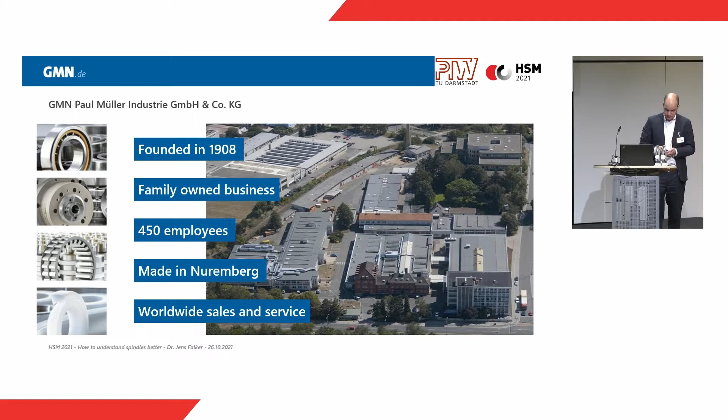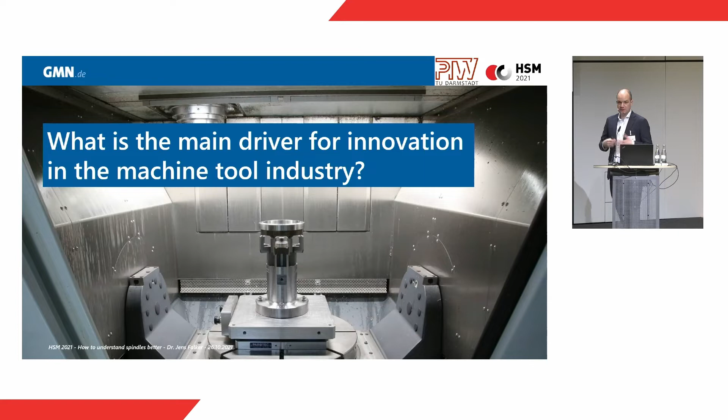In this presentation, I want to give you an impression on digitalization. When I was preparing the speech, I asked myself, what are the main drivers for innovation in the machine industry today? When you go to conferences nowadays, and it started again a couple of weeks ago when I was in Aachen, we talked about data-driven sustainability, how can we use data. I looked in the newspapers and found an article about trends in the machine tool industry.

So one can say digitalization is the key driver of innovation nowadays. It's also, as we have just seen, the research projects, most of them are about using sensors, bringing information together, bringing collaboration cross-domain. The machine manufacturer, the spindle manufacturer, the tool manufacturer, all the different knowledges are at different people or different companies, and we have to bring this together. This is what digitalization is about.

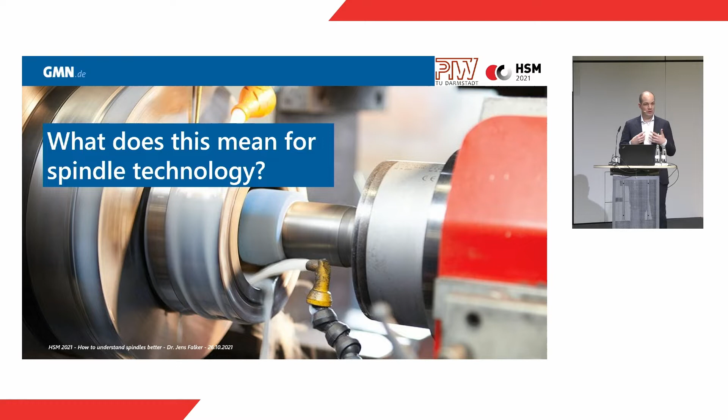For us as a spindle manufacturer, the question now is what does this mean, what does this mean for spindle technology, what is our duty now, how can we address this. Let me start with a short example. When I went to university, we talked about the automation pyramid. We had a strict hierarchical organization of how a company works: you have field devices, sensors, and then the different levels within your company.

Nowadays, this pyramid is transferred to a network. The hierarchies we had in the past are gone. It's possible to communicate between all the different layers of a company, so a sensor can talk to the ERP system. We don't need the SPS for this anymore. It's now possible that everything can be interconnected, and this is more or less the basis for digitalization, for new solutions, for this kind of new business models and so on. For us, as a spindle manufacturer, we are at the very bottom of this.

We are a classical field device. We have sensors in our spindles, we are connected to the SPS, and in the past, the spindle ended at the end of the spindle. We didn't look what comes next. Cables came out, we were connected to the SPS, and we were done with our business.

And this has changed because now we can make a connection to all the different layers. We can not only connect to the SPS, we can connect to the MES, to the ERP system, and we can even connect to different companies. We can interconnect our spindles between different facilities at different places on the globe. This is what the new technology brings to us, or what possibilities are there.

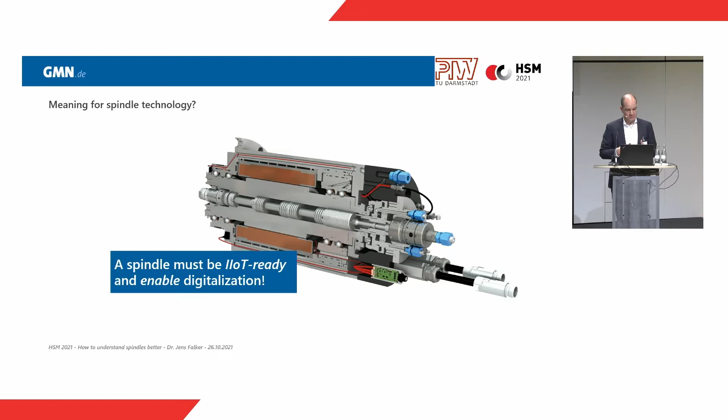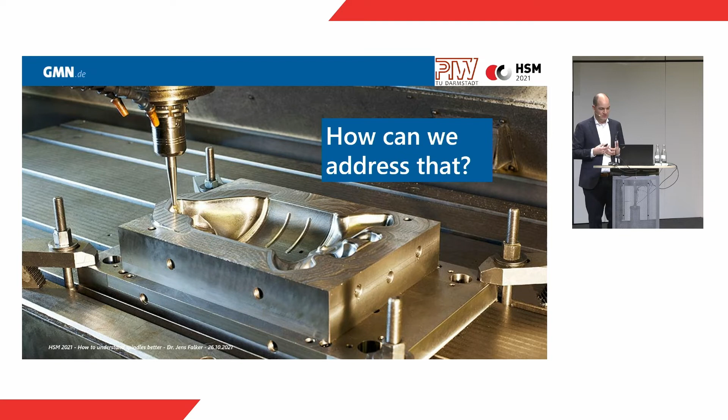Let me explain how this can work, or how we as a spindle manufacturer can address this, how we can be IIoT ready. To explain this, I want to start at the very beginning. At the first generation, when we started building spindles, we built spindles with external drive. This was a pure mechanical component: bearing, shaft, housing, done.

Then we started to integrate the drive. We had motor spindles, which is common today. In these spindles, we already had some sensors. But nowadays, state of the art, we have integrated sensor systems. So the spindle is not just a mechanical part with a motor, it also has sensors, and it does not only have sensors, but it also has microchips in it which interpret sensor information, which give information. So it's integrated sensor systems. But still, this is just where we are today, and it's not really digital.

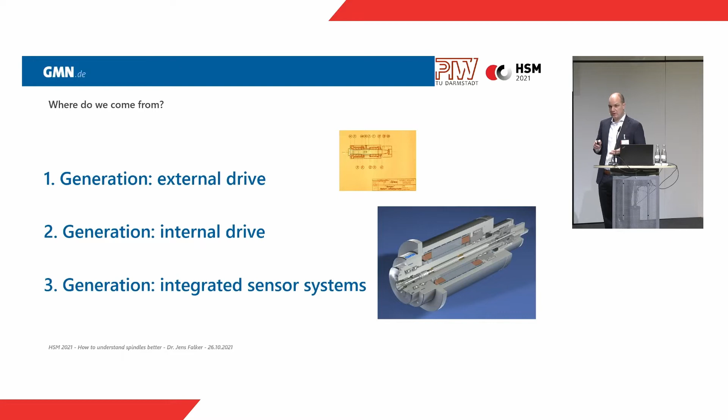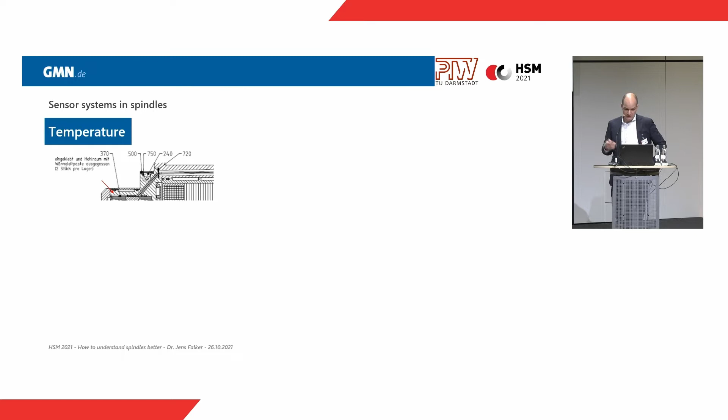Let me give you some examples of what we have in a spindle. For example, very common, we have temperature sensors, very easy PT elements, which are in the spindle. We have acceleration sensors. We have the clamping unit. This is a good example for an integrated sensor system. Such a system has a couple of sensors, 3, 4, 5 sensors, which measure the position of the shaft, measure some other systems, and you get information on what your clamping unit does too. Is the tool in the right position? Is there a tool in the spindle or not? So you get real information, you don't just get the position of the shaft. The interpretation is already done in the spindle.

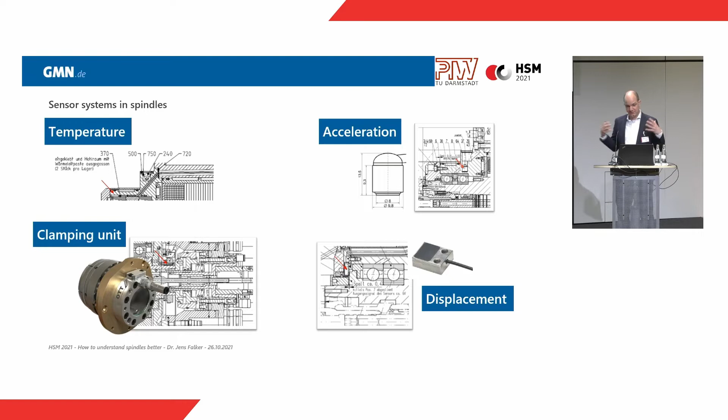And another example, we implement displacement sensors. So many different sensors which are in the spindle, and this is very common. All of us do this, all our competitors do this. But how does the information come, or how is the information created?

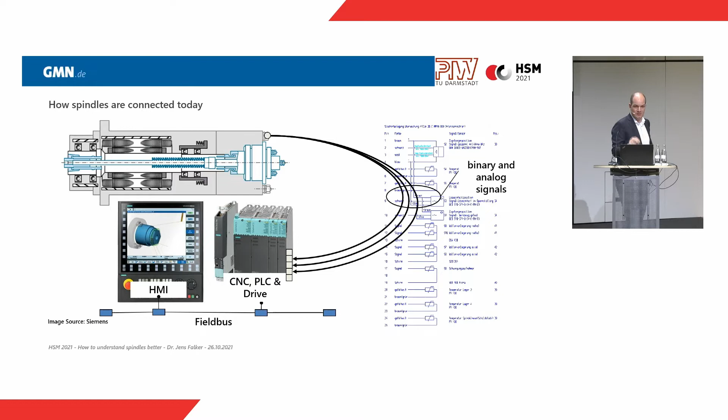When you look at this picture, this is how spindles are connected today. There's a multi-plug at the back of the spindle with, I don't know, 20, 25, 26 pins. And all the signals coming out of the spindles are analog or binary signals. These signals are brought to the machine cabinet, and there the analog digital converter is used to bring the information into the digital world, and you bring it to the field bus and you can use it.

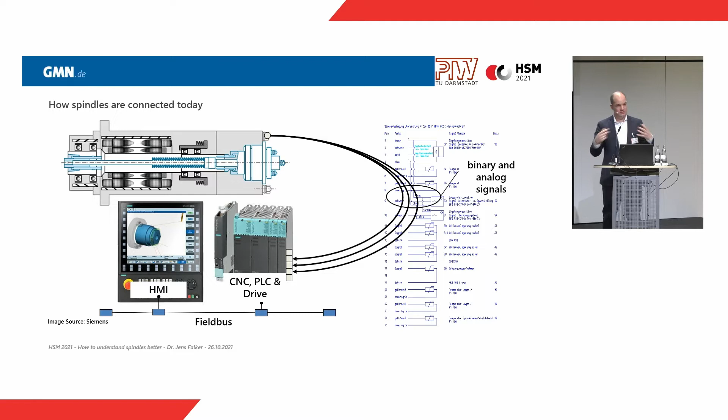Let me give you an example from our all-day life. This is when you are in your home office and you want to plug your mouse into your computer. This is as if you need a screwdriver to bring your mouse to your computer. This is the level the industry is at the moment. So that's not just a USB port, you just plug it in and everything is running. You need a screwdriver and you need tools, you need to implement things. It's very, very complicated. And in our opinion, this is not up to date anymore. There are much better solutions for this, and this is the basis for a digital spindle.

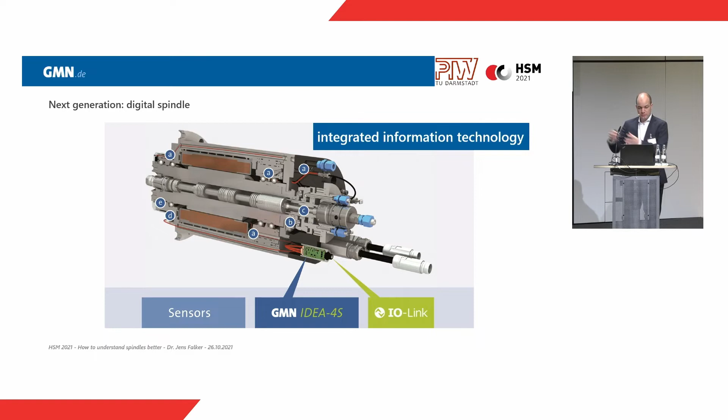So in our opinion, the next spindle has to be digital. The sensors within the spindles have to be integrated into information technology, and for this we use an embedded system we call IDEA4S. So the AD converters are within the spindle. The information is coming to the machine cabinet in a digital format. So we utilize a serial interface to connect spindle and machine. And this makes it possible to not only bring the information from the spindle to the machine, it also makes it possible to bring information from the machine to the spindle.

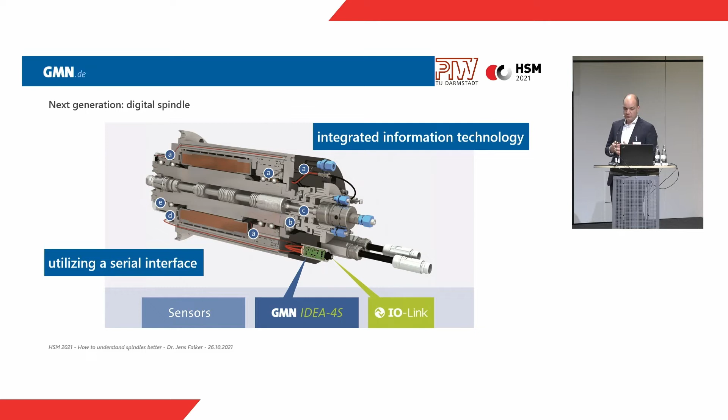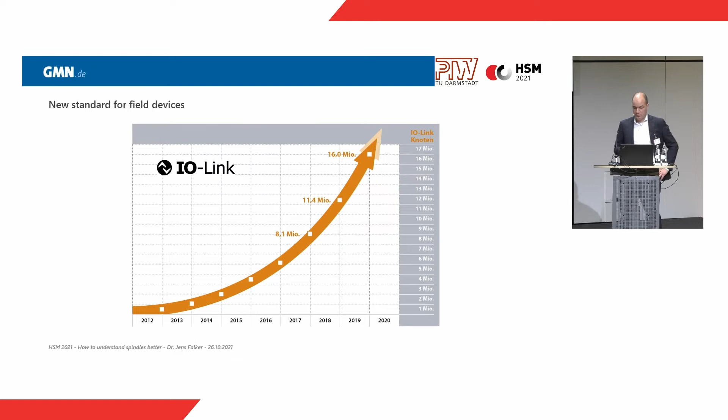Why do we use IO-Link? We use IO-Link because it's a standard widely used in the industry, and in our opinion, it's the new standard for field devices, for standard sensors. When you look at the sensor manufacturers, it's often the case that IO-Link sensors are even cheaper than classical analog or digital sensors. So this technology is coming to the market. The nodes in the field are growing exponentially, and this gives us new opportunities.

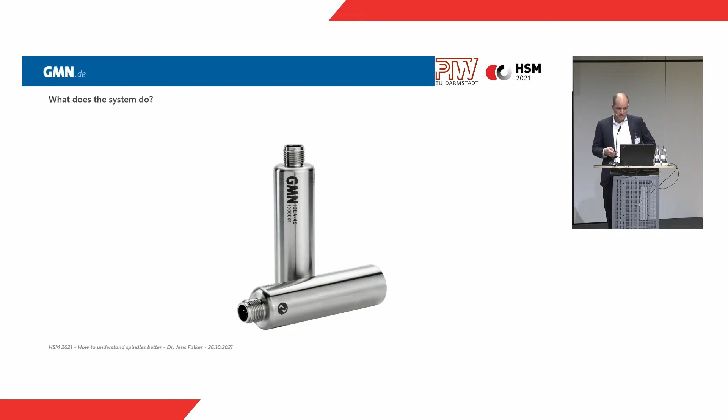So what does our system do? At the end, it's a platform for digitalization, and the idea in the first spot is to measure information, to bring sensor information to our machine manufacturers, so you know what is the temperature of a bearing, what is the displacement of the shaft. At the beginning, it's just measuring.

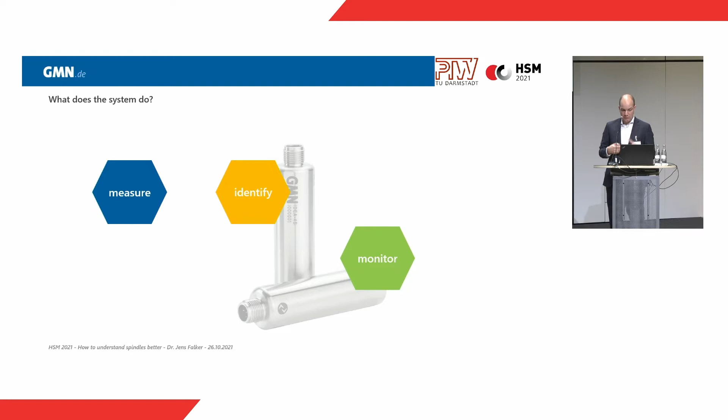But it's also identifying, so what is the spindle I have there? What does the spindle do? What are the properties? And then how can we monitor a spindle?

Just to give you an example, what signals can be measured: it's the speed, the clamping unit, the temperature, the displacement, the vibration. So this kind of information is already there, and also the standard we have today. So the information is just analog and binary, and now it's digital.

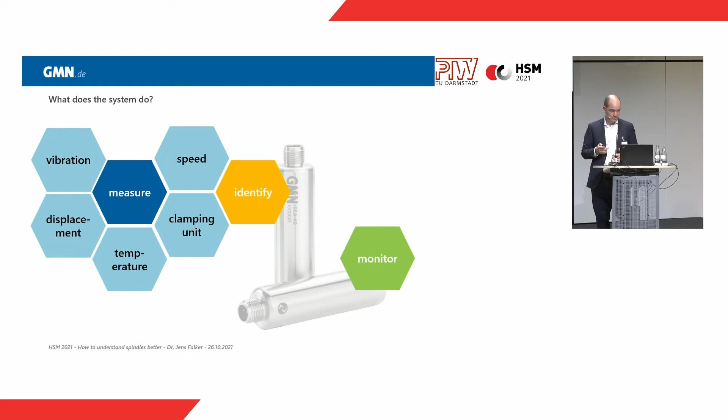We can identify the spindle with a digital type plate, and we can also put application data into a spindle—what is the spindle used for? The machine can write this information into the spindle, and when the spindle comes back to service, you know the spindle has been mounted to this machine in this factory, and it has been used for that. So you understand what your spindle is used for.

It also makes it possible to do something like asset tracking. A spindle is a very valuable component of a machine tool, and many end customers have several machines, several spindles. They have spindles in stock for repair, and if they know which spindle is in which machine at every moment, and which spindle is in stock, it's much easier to know where are my assets and to plan everything. At the end, we want to be a platform to monitor a spindle.

We want to give a fingerprint, we want to give a status on sensor signals, so it's not just about giving the temperature information, but telling you, is the temperature okay? And we try to bring our knowledge, our domain knowledge as a spindle manufacturer into this.

So we try to look not only at one signal, we try to look at all signals and interconnect them. Just to give you an example, when the temperature of a spindle is 40 degrees, this doesn't tell you anything. It's very important to know what's the speed at this moment—is it 60,000 RPM, or 30,000 RPM, or 10,000 RPM?

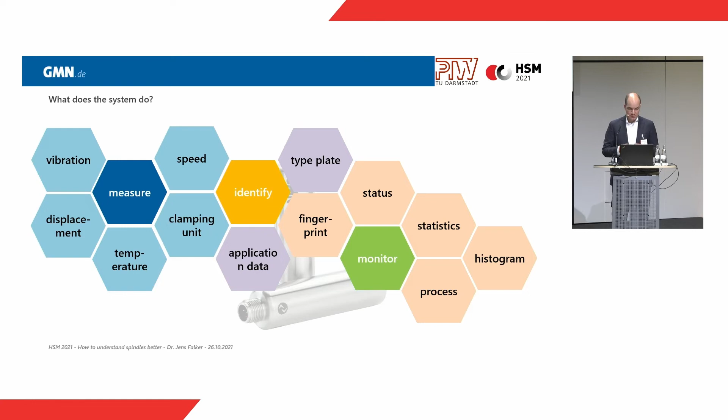What we hopefully will talk about over the next 2 days is that we have to bring the knowledge from all the different domains within a machine tool together. The information on the tool is somewhere else than the information on a drive and the information of a spindle. And someone who builds a tool has more knowledge on a tool than someone who builds spindles, and the other way around.

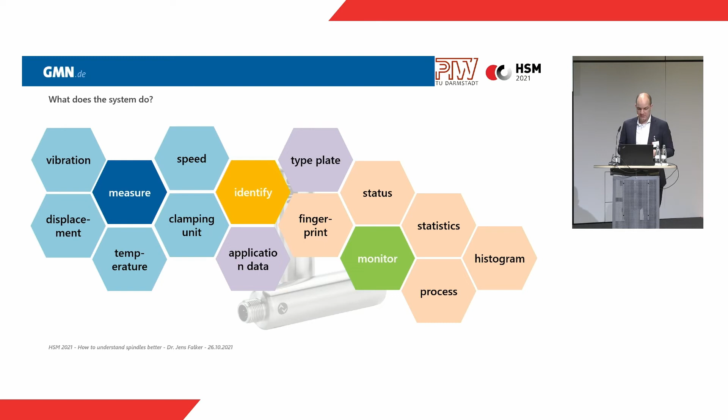So we have to bring this knowledge together, and we need a platform to utilize this, to make it possible to access this information by the end customer. We have to generate value there. Just a very, very short example for a histogram.

As I was talking about, the idea is to bring different information together. As you can see here, this is a diagram with the rotational speed of the spindle and the temperature of the bearing. So this is the kind of information we can collect within the spindle. We know at certain speed ranges, how long has the spindle been operated at a certain speed range, and we can also look at this with the temperature.

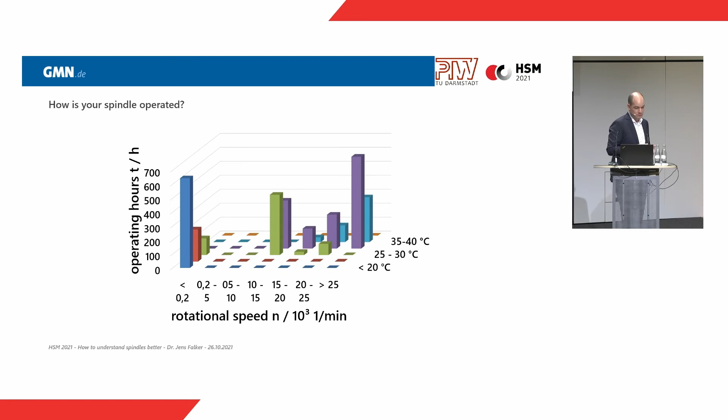A temperature of 40 degrees at maximum speed is a different thing than 40 degrees at medium speed. So you have to interconnect this information and bring it together with your knowledge about the product.

So at the end, our system is first of all digitizing a spindle. It brings the analog and binary values or information of a spindle we have today into the digital world and connects it to IoT infrastructure. And as I said, for us, spindles usually ended at the cover of the back of the spindle.

And nowadays, with this technology, we are now connecting to the machine infrastructure, where there is the IO-Link master, which connects the information to the SPS, where it can be used as today to monitor temperatures, vibration levels, and so on. But, and this is the very important part, in the world of IoT, it's now possible to bypass this information to the IoT world.

So the information of a sensor does not only go to the SPS, it can also go bypassed to another solution, to interconnect machines, to bring data into the cloud, to bring it to an edge device, to make remote services possible without putting performance out of the SPS.

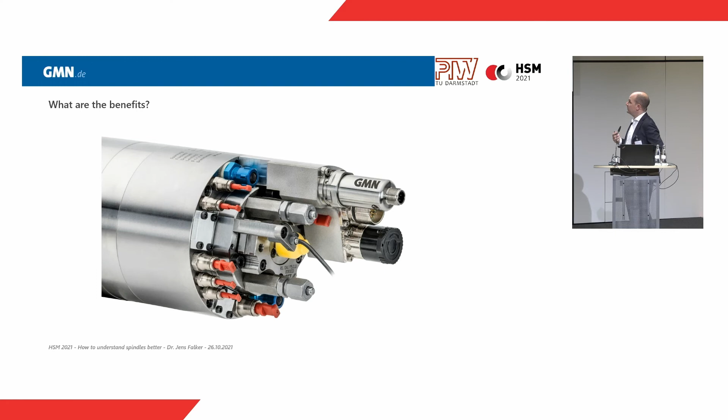So what are the benefits of such a system, just to give you a few? First of all, it's easy and robust machine integration. And then it enables digitalization, and that's what I meant.

So the system, first of all, brings the information of a spindle to the digital world. It's not in the first step creating new business models or these kind of things. It's just the start. It's just the first step.

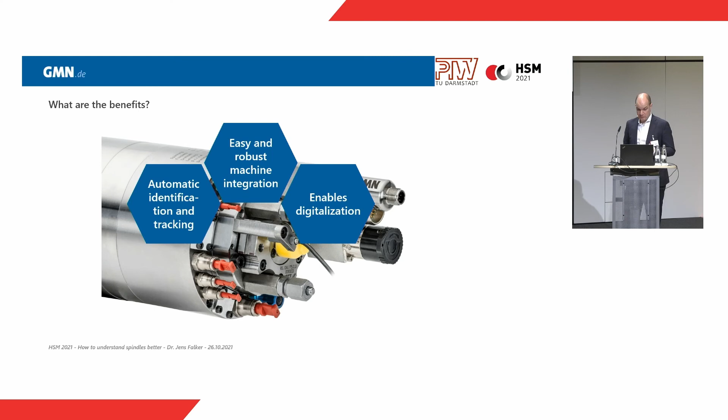Digital information in two directions. So the spindle and the machine can now talk. This was not possible before. So it enables digitalization. It makes it possible to identify a spindle and to track a spindle.

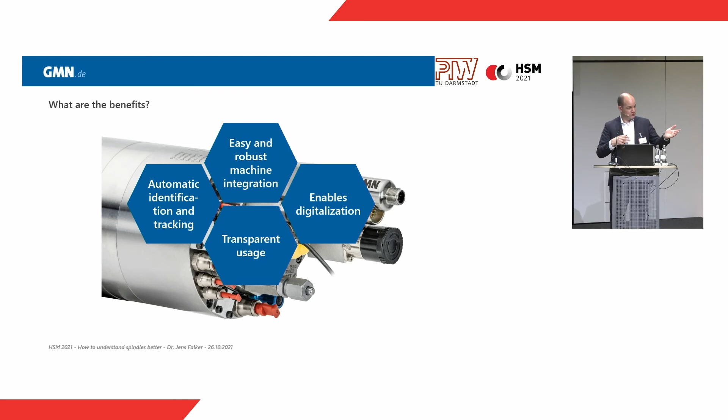It generates transparent usage, so you know at which speed, at which temperatures, and so on. So in a case of service, you can understand better what has happened to your spindle. It makes it therefore easier to do diagnosis during service, to understand what has your spindle been doing, how has it been operated, and was this good or was it not good? It gives you a hint.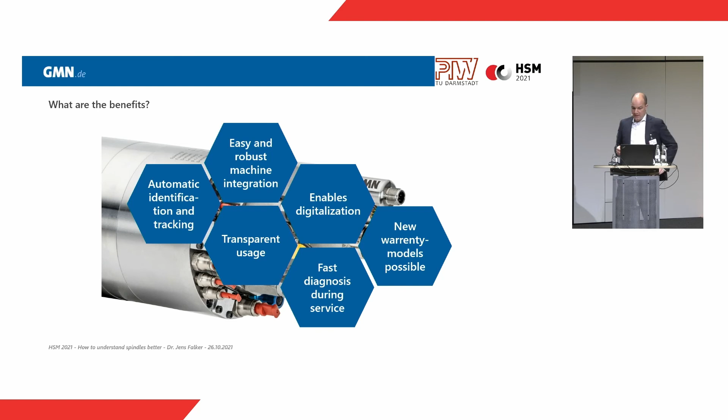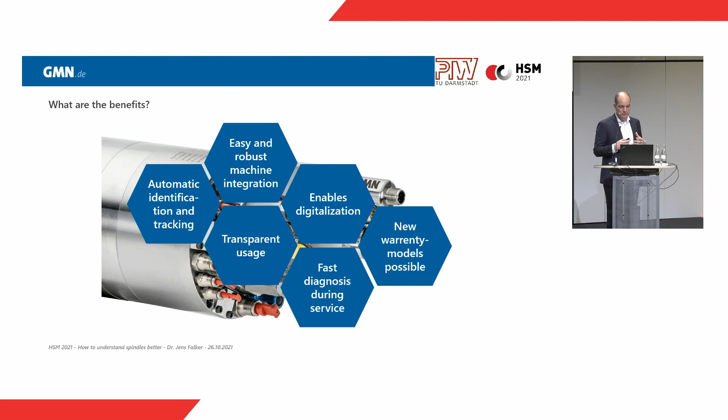And it also makes it possible to do new warranty models. But as I said, this is just the basis. This is not really an IoT solution at the moment. It's just an analog information which is now digitized, which can be used, but we now have to do the next steps.

And create customer benefits by collaboration. So the spindle manufacturer has to collaborate with the machine manufacturer, has to collaborate with the tool supplier. We all have to find our ways to work together. And I think it's a change of paradigm in the industry, because in the past you bought a ball bearing, you bought a ball screw, you bought a spindle, and you put it into your machine tool and it worked.

And for creating IoT solutions or to create benefits for the end customer, we have to find a way to collaborate. We have to find a solution, or we have to find a way to bring our knowledge from different domains together to create benefits for our customers. And I think this is the main goal for us in the industry.

And I also think the research or academia should pick this up, because I think research can create this collaboration. It's a possibility for you to bring people together, to find use cases, to build demonstrators, to help us as an industry which comes from the mechanical world, understand how software, how this world works, and bring new ways to us to work together. And I think this would be a very nice thing.

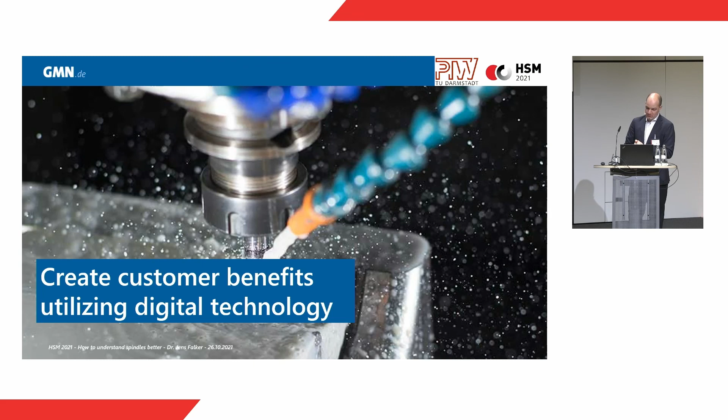And this brings me to the end of my talk. We think we are en route to the digital spindle. We did the first step. We are now planning to do the next. And we are looking to collaborate and work with you together to start this journey into this new world. Thank you very much.